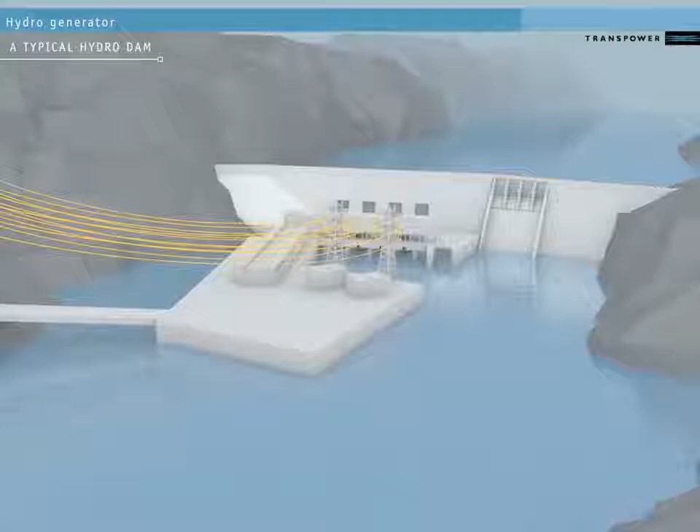From outside the station, we can't see the generators. If we approach though, we can see the power lines or conductors that carry the electricity from the station to the national grid. Each power conductor connects to a turbine-powered generator inside the dam itself. Let's go inside the dam now and look at one hydro generator to see how the power is produced.

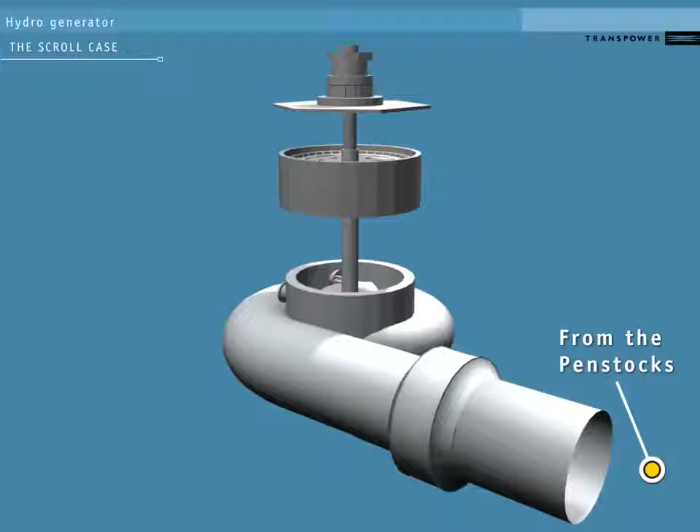The water from above the dam flows down through pipes called penstocks. Each penstock has its own headgate at the top to stop water flow for maintenance or during an emergency. At the end of the penstock is the scroll case. This curls around the turbine like a snail shell. It's designed to create a consistent pressure of water entering the turbine from all sides.

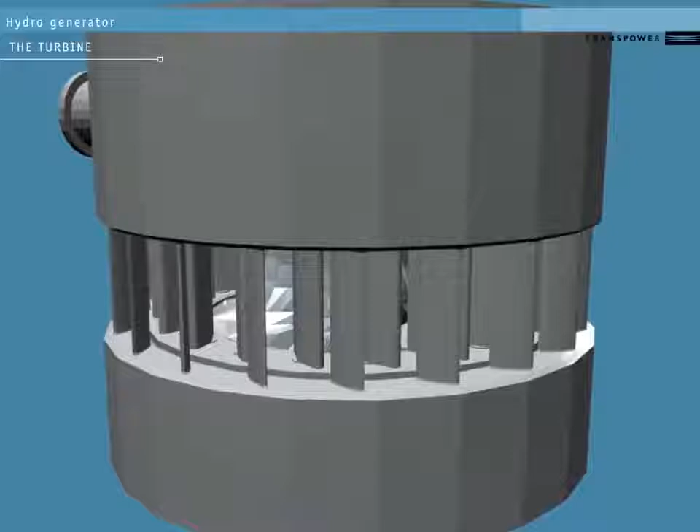Inside the scroll case is a set of vanes called the Wicket Gates. These control how water flows into the turbine. The Wicket Gates are controlled by an external governor system. This opens and closes them in response to conditions on the national grid. A high load on the system slows the turbine. The governor system reacts by opening the gates further to speed it back up. Conversely, it will narrow the Wicket Gates in response to low load on the system.

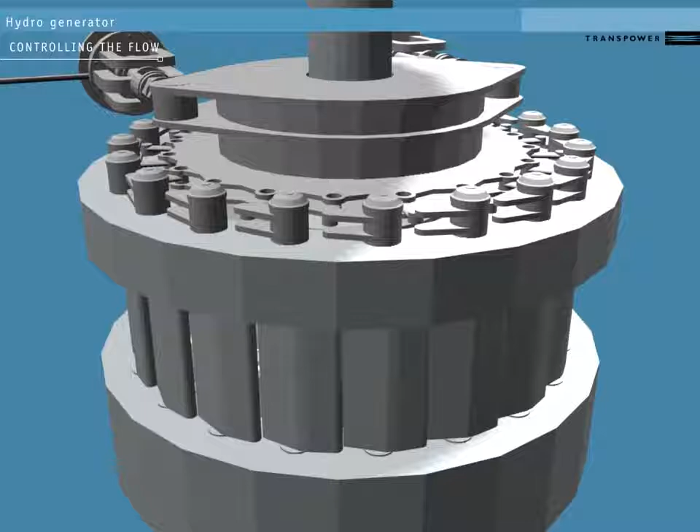Beyond the Wicket Gates, we can see the turbine blades. The blades are shaped to extract the most possible spin from the moving water. The turbine blades and the shaft connecting them to the generator are called the runner. We will expand this into its parts so we can see them clearly.

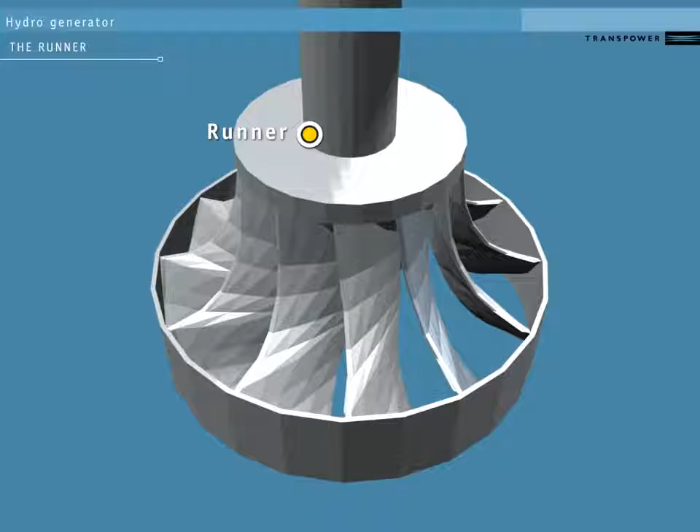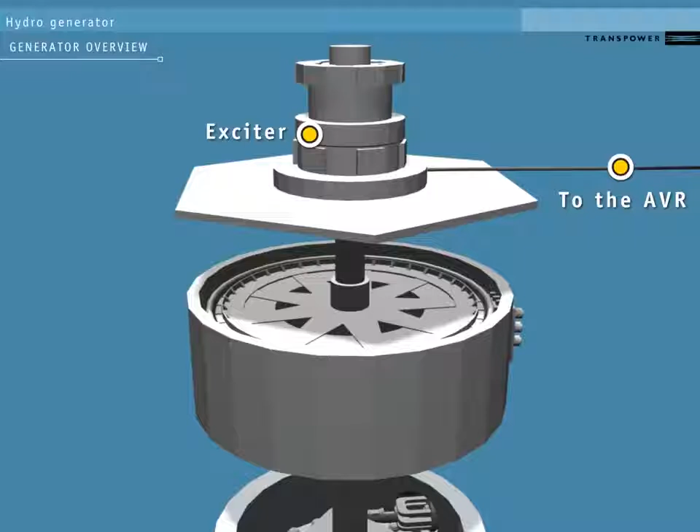At the top is the exciter, which gets a small DC power supply from a cable attached to an external controller called the Automatic Voltage Regulator, or the AVR. Below the exciter is the generator. The inside is a rotor, turned by the runner. The outside stationary part is the stator. This is made up of a set of 3 coils of copper wire called windings.

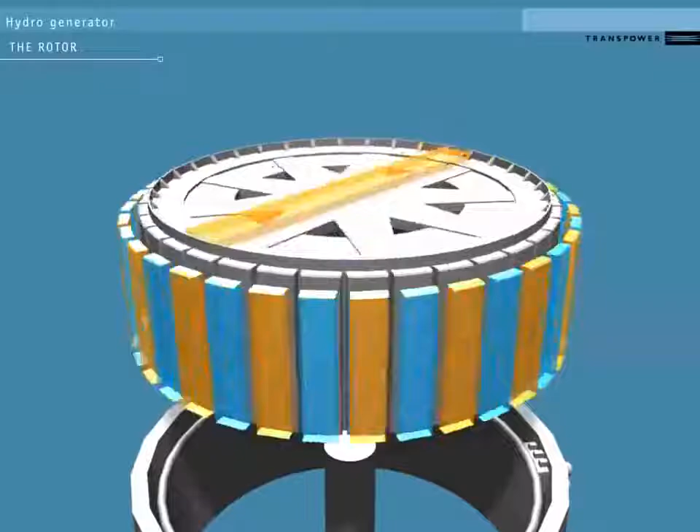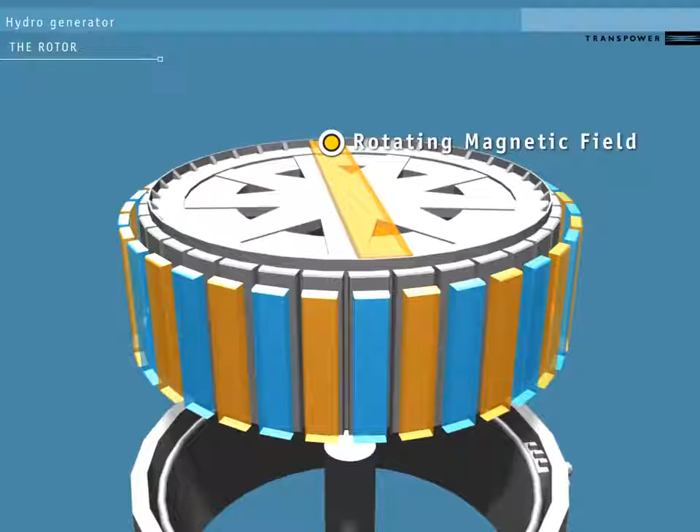On the rotor are a number of electromagnets, powered by the DC current from the exciter. If these are switched off, the turbine will be able to spin without generating any electricity. The magnet's poles on the outside of the rotor create a separate rotating magnetic field for each magnet. The magnets are lined up so that adjacent poles always have opposite fields to each other, north-south, north-south.

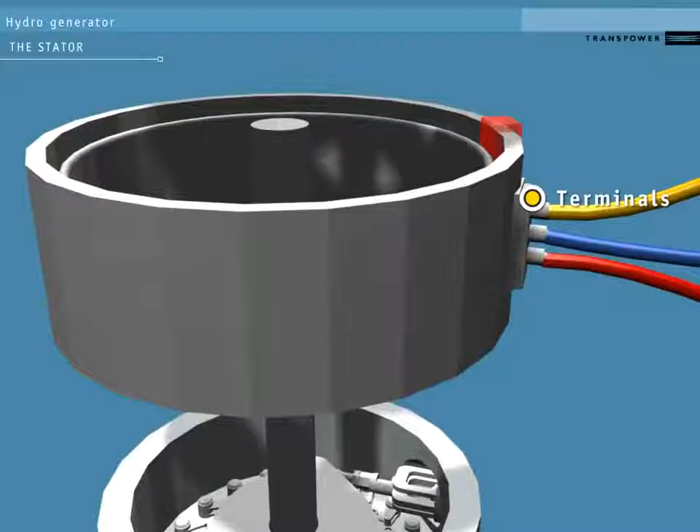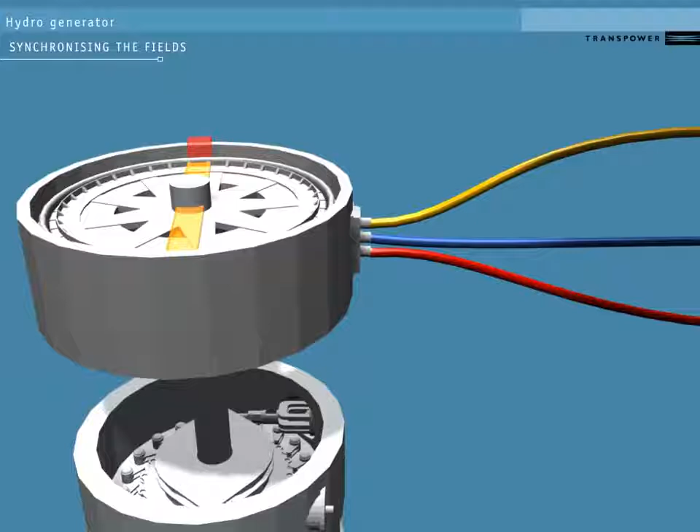As the rotor spins within the stator, each pole's magnetic field acts on the stator's windings. Each time a pole makes one full revolution, one pulse of AC power is generated in the windings and transmitted towards the grid by conductors attached to the stator. Because the stator is connected to the grid, it's important that the pulses are in time with the grid frequency. When the pulses are in time with the grid frequency, we say that the generator is synchronized.

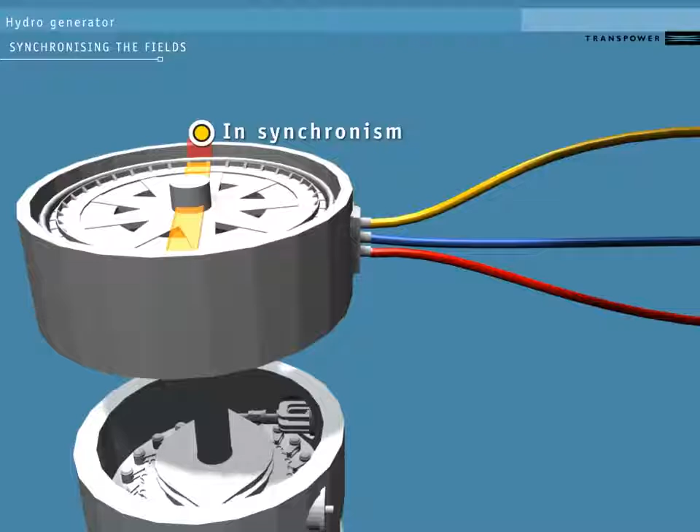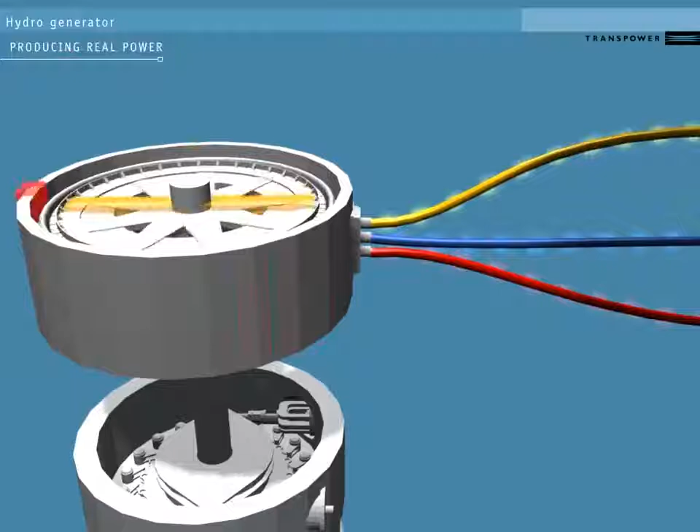System conditions can push the stator's magnetic fields out of sync with the rotor. The difference between the movement of the stator's magnetic field and the rotor's is the torque angle. The rotor has many electromagnets on it, producing a consistent flow of power. The generator produces 3-phase power by using different conductors to carry the power generated along different parts of the stator, as shown here. This creates a 3-phase alternating current, which is represented by the sine wave.